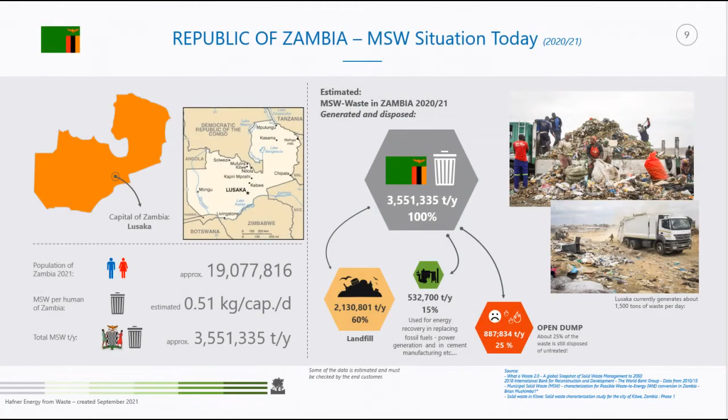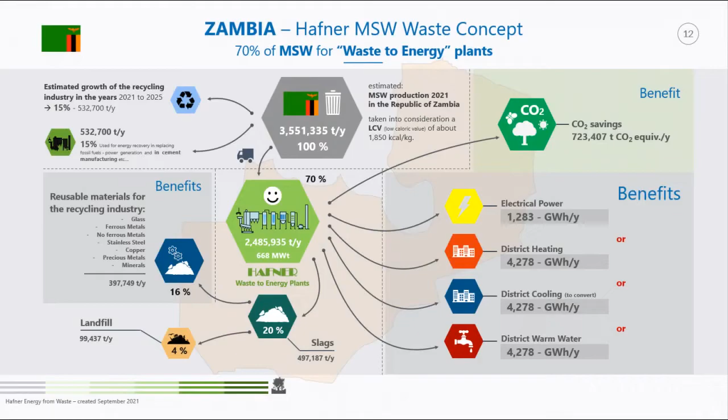For years, waste management has emerged as one of the greatest challenges facing Lusaka City. It is not a new problem, but the volume of waste generated continues to increase faster than the city authorities' ability to improve the financial and technical resources needed to match this growth. Currently, the Lusaka City Council is struggling to manage waste under tight budgets and highly inadequate, malfunctioning equipment. This is evidenced by inefficient collection practices, variable levels of service, and poor, unhygienic operating practices in waste management in the city.

In most urban areas in Zambia, only a small fraction of the waste generated daily is collected and safely disposed of. The rest is anyone's guess.

Lusaka City is facing challenges in managing waste because of indiscriminate illegal dumping and littering, and a public which is seemingly not sensitive to the garbage around it, or indeed has any awareness of what represents responsible waste management.

There are a lot of illegal players in waste management. But since they are not registered, they do not dump the waste they collect at the designated place, Chunga dump site. Instead, they dump the waste anywhere, mostly at night. There are laws in place that prohibit indiscriminate waste disposal, but people are not sensitive, and enforcing this law has been a challenge.

Chunga dump site sits on 10 acres of land, north of Lusaka City. Only a quarter of the land at Chunga dump site is being utilized. The current status of the site looking full is just artificial. The problem is that there is not enough equipment to compact the waste, and as a result the management of this waste has been challenging.

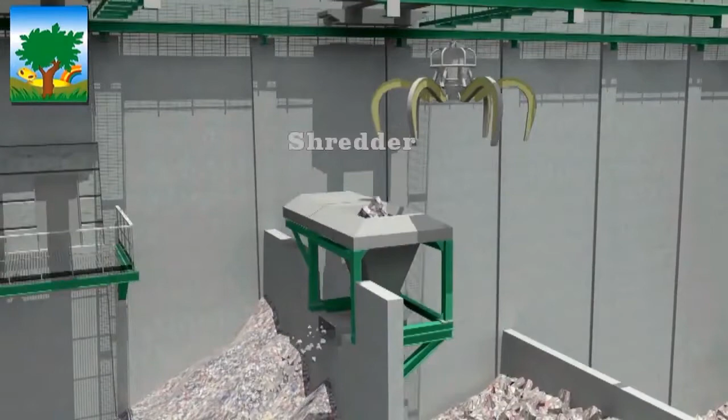In 2014, the Lusaka City Council embarked on a project to erect a wall fence around the dump site. The reasons for securing the dump site were simple: to improve the sanitary conditions at the site, to control garbage from spilling over, and to deter scavengers from flocking to the dump site.

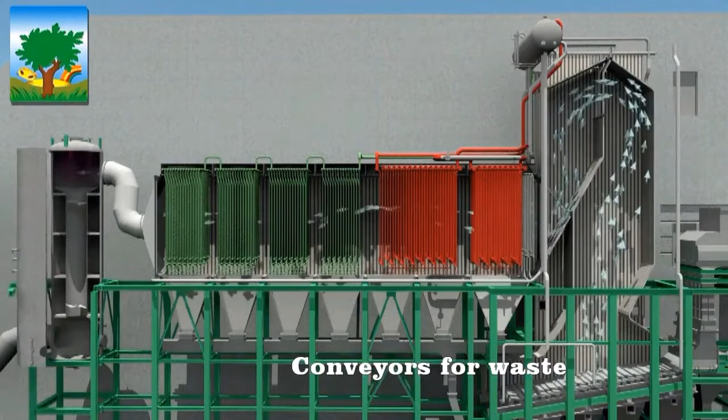However, four years down the line, the situation at Chunga dump site, which is surrounded by residential houses, is more depressing than ever. Indiscriminate or uncoordinated disposal of waste at the dump site by various waste management companies has not only resulted in a shortage of space but has posed a health hazard to people living in nearby households. Some of the litter from the dump site has found its way onto the newly constructed ring road, resulting in a mess.

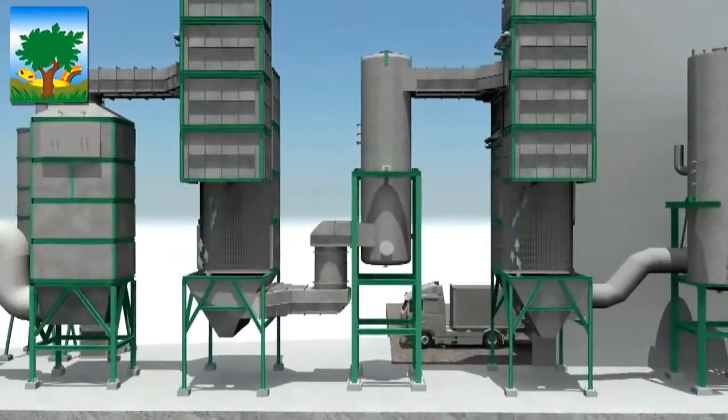WUMA has the perfect solution to help Lusaka reduce its waste-induced challenges. We have developed a decentralized waste management and power generation solution named the WUMA Ecosystem, which helps countries and cities cope with the increasing waste challenges they are facing.

The WUMA Ecosystem recycles waste into raw materials and energy in the most efficient manner, reducing waste quantity by over 95%. The small to medium-sized WUMA ecosystems are distributed close to where the waste is generated, offering significant waste logistics and power distribution savings in addition to solving the waste problem.